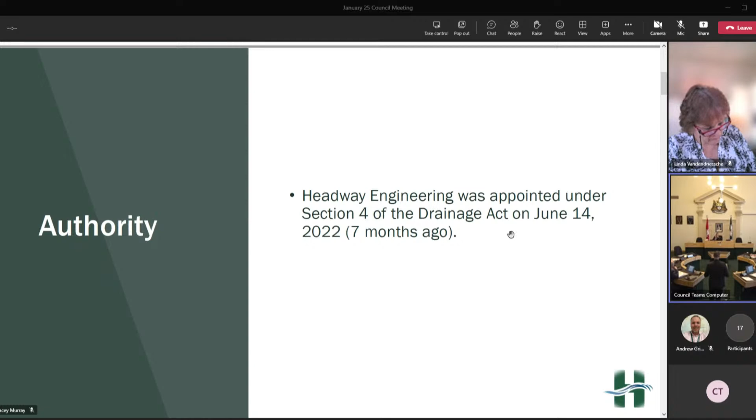The authority for preparing this report came from a council meeting on June 14th of 2022, about 7 months ago, under Section 4 of the Drainage Act. There were some appointments prior to that, but this June 14th, 2022 appointment is the one that authorizes this report. Do you mind going to the next slide, please?

The next slide, on the right-hand side, shows an outline of the county with a red callout roughly in the middle of the county near Lyndoch. It shows the location of the project, on the east side of Lyndoch. In the callout there's a purple shaded area that represents the watershed for the area.

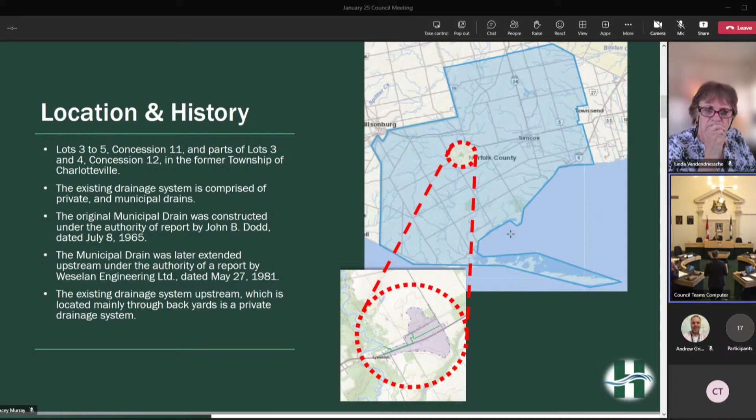In the interest of time, since I only have 5 minutes to present this, I'm going to skip the discussion about the existing municipal drains in place. If you don't mind, just advance the slide please.

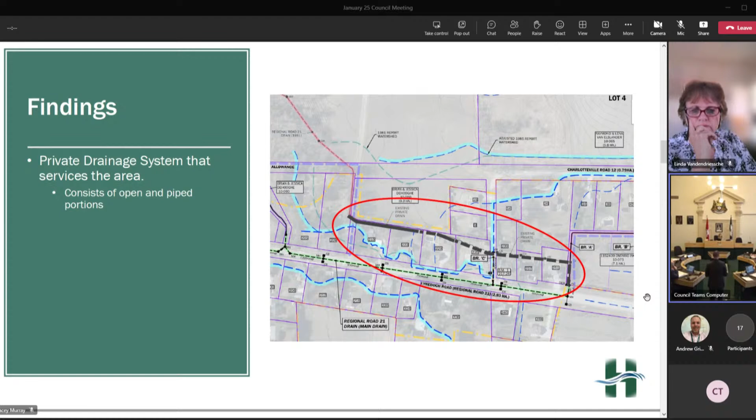This slide gets into some of the findings and reasons this drain has come up. There's an existing private drainage system in place, highlighted on the right-hand side by the black dashed and solid line through the rear yards of properties fronting onto Lyndoch Road. This system is private, not municipal. Downstream, there is an existing municipal drainage system highlighted by the green line, and this existing system is in a poor state of repair—it's undersized, it alternates between open and closed, and it's in bad condition. Could you please advance the slide?

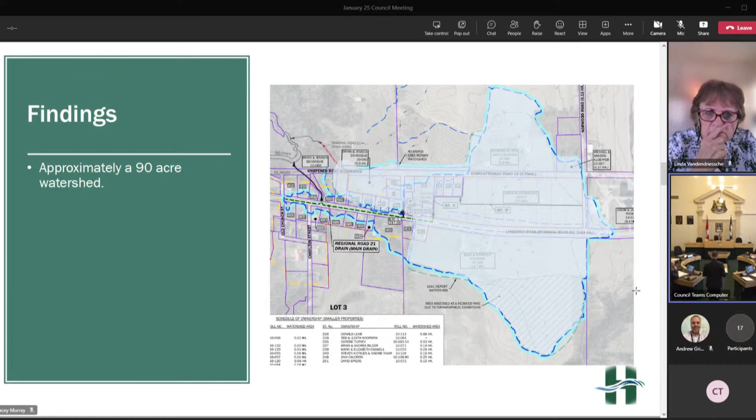The approximate watershed area is about 90 acres, and it drains generally from east to west, from the east side of Lyndoch, passing through until it hits Big Creek. Can you go to the next slide, please?

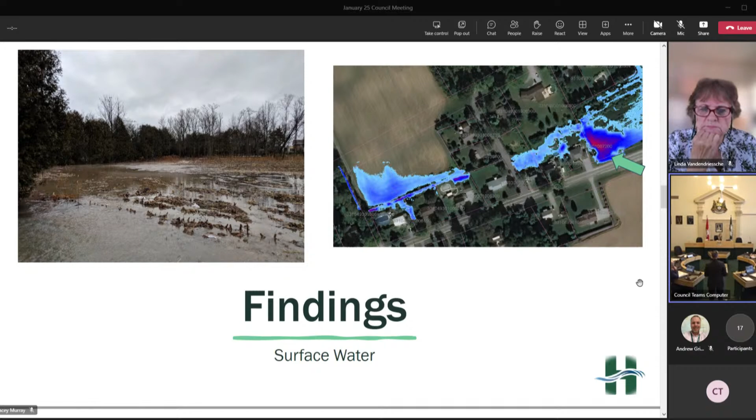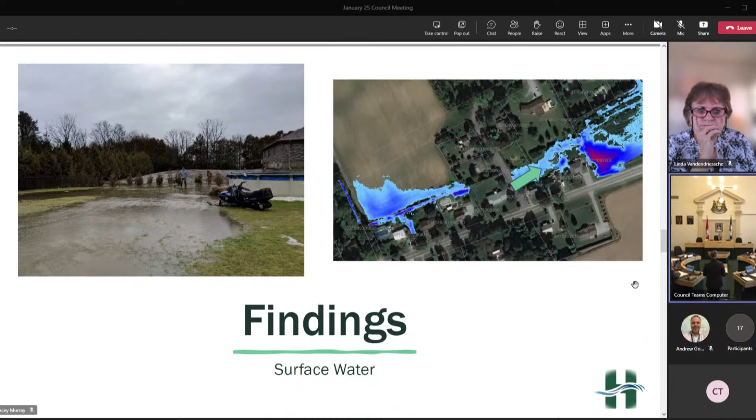This is moving into the backyards on Lyndoch Road or fronting onto Lyndoch Road, just showing the flow path of the existing storm event as it moves through. The next page, please.

So this is a similar location, just upstream a little bit further. And then if we can move on to the last photo, the next page please. This is a photo taken in the agricultural area behind the rear yards, and again it just shows the flooding that's occurring there too.

So some of our findings with respect to surface flooding. Could you please advance to the next slide? Another finding too is that the county intends to redo Regional Road 21, resurface the road through there. So that's a pretty important part too.

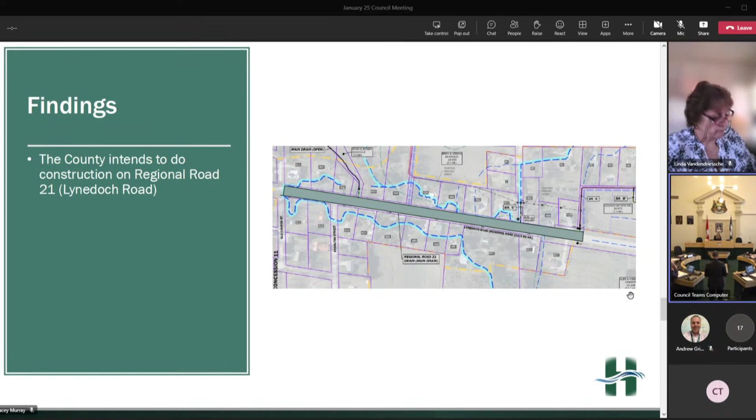We're coupling basically this construction with that resurfacing or that construction work as well. And the next page, please. So what we're recommending is to construct a new municipal drainage system. It's called Regional Road 21 Municipal Drain.

It's designed to a 1 in 5 year event, and pipe sizes range from 15-inch to 48-inch diameter pipe. It consists of a main drain plus 3 branches, branches A and B to be incorporated on the development property, and then branch C, which extends up Charlotteville Road 12 and hooks up with the existing private system. The outlet for the system is the Dehooghe Ravine, which therefore requires some ravine improvements as well.

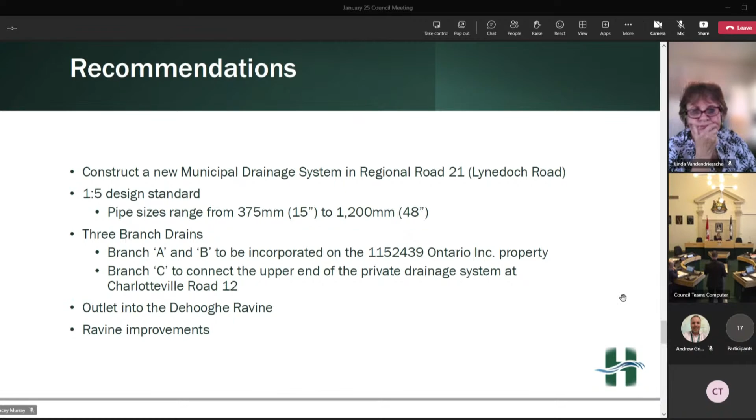Can we go to the next slide as well? This image on the left-hand side is the exact same one that was the key plan before. It shows the existing flood limits for a rainfall event. And then on the right-hand side is the predicted flood limits if this system gets constructed and the existing private system still would remain in place. But there'd be vast improvements upstream, especially upstream of Charlotteville Road 12.

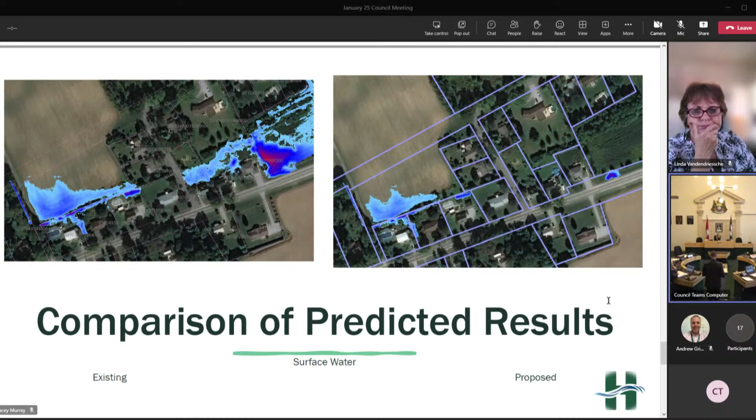Can we go to the next slide, please? Another pretty big factor too is there is an existing municipal drainage system downstream. And this area, which is kind of outlined in blue, but a portion of it is highlighted now in red, that red area gets removed from the existing municipal drain and put into the new municipal drain. In other words, it provides relief to the private system and the municipal drain. One of the big reasons that we can expect to see improvements in flooding.

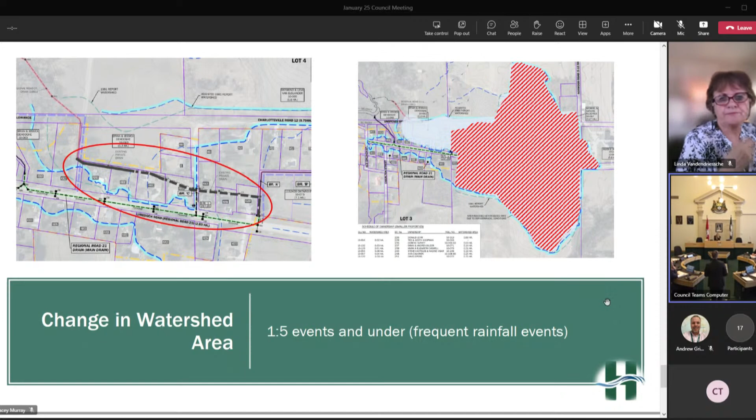So if there's any questions, that completes my presentation. If there's any questions regarding that report.

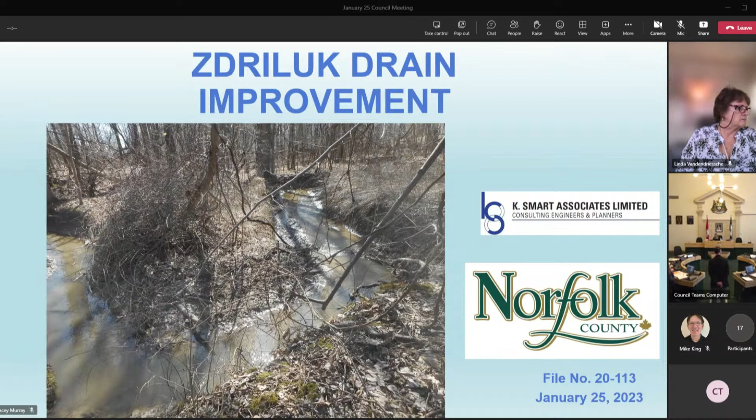We were originally appointed to do this report under Section 78. It's an improvement of an existing municipal drain. The original drainage system dates back to the 1960s, and it's a tile system with approximately less than a quarter inch drainage coefficient, which is a very low number by today's modern standards.

After we were appointed in January 2020, in June we had on-site meetings. It was during lockdown at that point, so we had to hold individual meetings with a bunch of the landowners along the drain. Subsequent to that, we had a number of public meetings where everyone in the watershed was notified, and the original design was changed based on that input, and we ended up going with a new route.

With that route, I finished my report and submitted it in December 2021, and we held the council meeting around that time. The report was referred back to me because there was a lot of discussion about the option we had gone with, and council requested additional meetings to allow landowners time to potentially come up with an agreement on which option they preferred, as well as another public meeting with the members of the watershed.

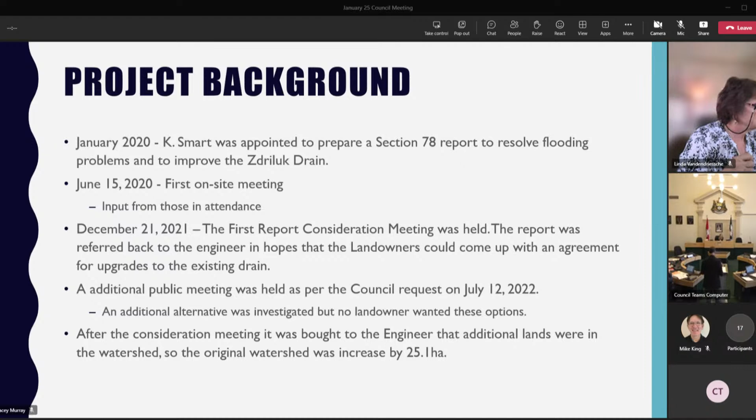We've gone through a number of different design options with this drain, 8 in total, and the proposed option in my report is what we've determined is the most cost-effective at this point. As an engineer, I'm obligated to go with that option. If individual landowners wanted to go with one of the other options presented, they were given that opportunity, but they would have to incur the increased cost. That was put forward to them, and no one in the watershed wanted to go with those options, so we've gone with the cheapest option, the most direct route to an outlet with the least amount of impact to all the lands in the watershed.

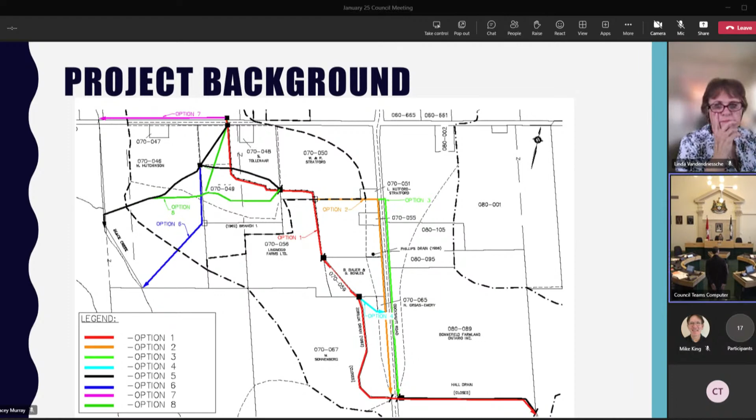Next slide. We've also had a number of meetings with environmental agencies, as well as discussions with landowners about this drain. Next one.

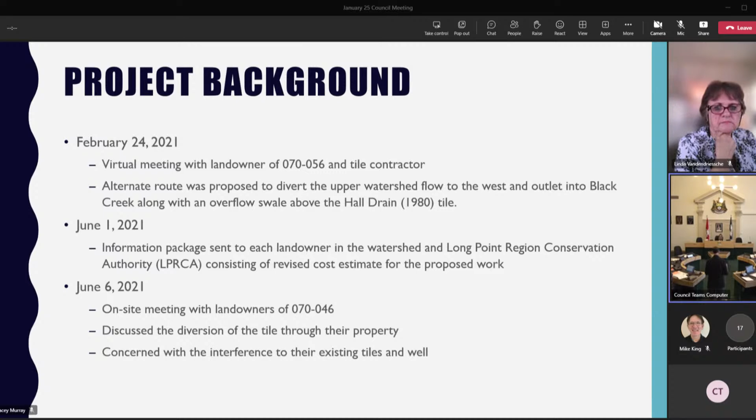Right now, there are a number of areas that do flood the existing drain. The water that's sort of upstream of Concession 11 Townsend Road, there's an area there that floods routinely.

And from there, it goes to the property to the south, and that property experiences quite a bit of flooding. It basically builds up on that property and eventually can go into a swale across the neighbor's property, which isn't part of the municipal drain now, and eventually dumps into the Cockshutt Road ditch, which has been deepened to deal with the additional water coming into this area, as well as other things.

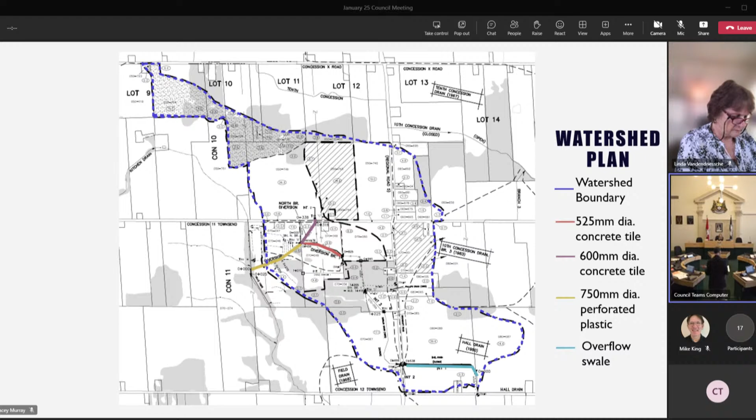It's in some places 250 millimeter clay tile, and in my experience, a tile of that age isn't — there's not much life left in it at this point. We've even had problems finding where that tile is in some places, so it's most likely not working to its original capacity at all.

Our total area in the watershed is about 294 hectares, and the total cost of the project is about $600,000. Of that, about $400,000 is for construction, and the remainder is for engineering and allowances, as well as administrative costs.

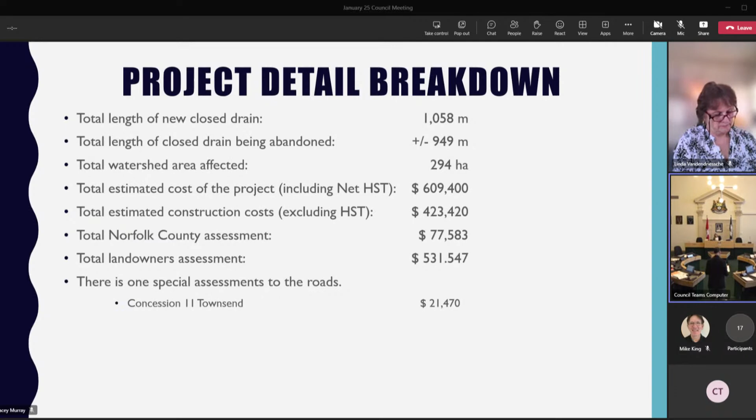The total assessment to the landowners is about $530,000, and about $77,000 is assessed to the county. Of that $77,000, approximately $21,000 is a special assessment to the roads, because we are crossing one of your roads for this project. Next slide.

So the objective of this meeting is to allow landowners to have input on the technical aspects of the drain, not to deal with assessments at this point. That will be dealt with at a subsequent meeting, the Court of Revision, and to allow landowners the opportunity to have any of their technical questions responded to, as well as council.

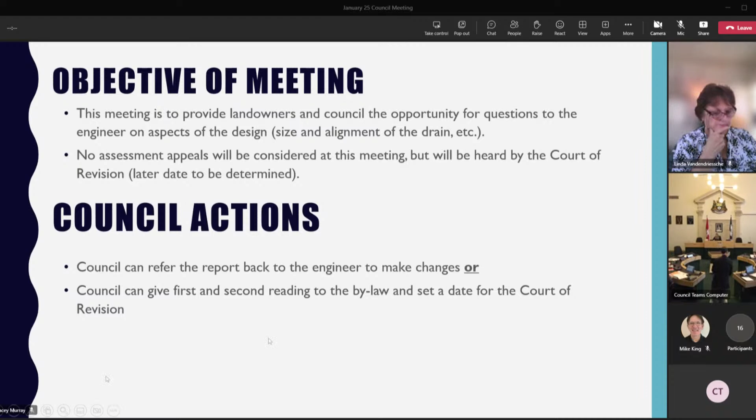Thank you, Mayor Martin. Through you to the presenter — I just want to go back, a couple times in your report you mentioned that with different options you were looking at, the landowners weren't interested in pursuing those options. Did they have their own other options, or I'm confused as to why they didn't want any of those?

It's actually a little bit of both. So landowners presented options to the engineer. The engineer would cost those options out and present it to the landowners to say, if you want to go with this option, this is what the additional cost will be. And other times it was the engineer that came up with new options and presented at that point. So it's a combination of both.